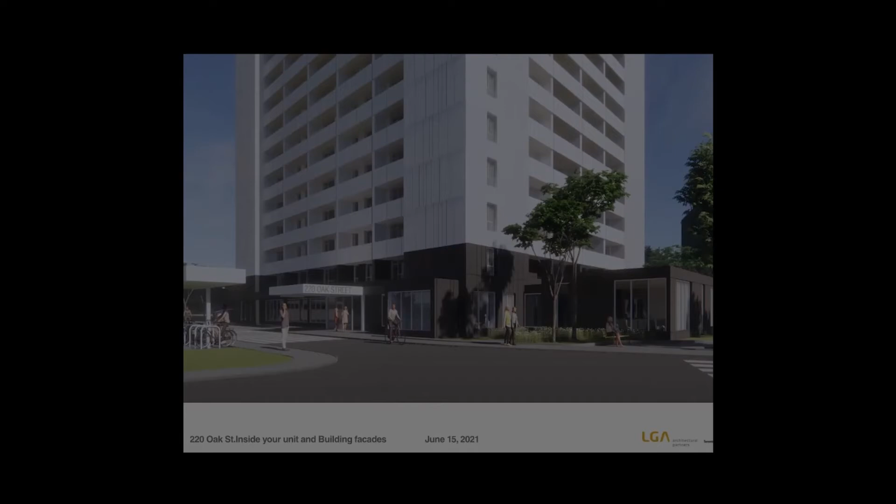First, just want to acknowledge some items here.

Despite the fact that this meeting is virtual, this is not how we want to do it, but this is how we're forced to do it in light of the past year.

First off the bat, we acknowledge the land that we are meeting on and within the cyber world on the traditional territory of many nations, including the Mississaugas of the Credit, the Anishinaabe, the Chippewa, the Haudenosaunee, and the Wendat peoples, and is now home to many diverse First Nations, Inuit, and Métis peoples.

We acknowledge that Toronto is covered by Treaty 13 with the Mississaugas of the Credit. Also like to acknowledge a lot of folks on the line right now.

So many people have been so important and with us along the way through the past couple of years. It's been a difficult road, especially within the past year.

But any project that's worth doing is worth doing well, and it's worth being as thorough as possible. And I think that's what we're trying to do here.

And so with that, I want to acknowledge and thank Kathy Birch for her help on the accessibility side of this project and coordinating that side.

Making sure that any designs that we're going to be endeavoring upon meet the needs of all people, able-bodied and not, ambulatory and not, and for anybody that has different abilities.

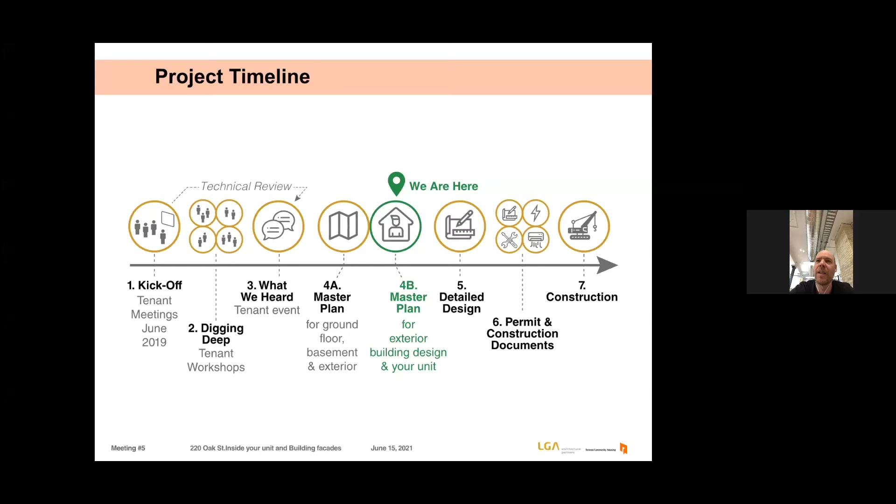Next slide. Just to recap all the engagement we've done - this is more a way to acknowledge and tip our hats off to everyone who's been part of this conversation since the beginning. It's really been a collaborative and a group effort.

We had two kickoff meetings, if you recall. Then we did four deep dives, four topical workshops, followed by sixteen deep dive workshops. That represented a lot of discussion. We heard a lot of different perspectives and points of view, and got the expertise of many different people who have been living at Oak for a long time, people who know the ins and outs of 220 Oak. We've shared all those notes with you, representing a ton of investigative work. We had two meetings afterwards to share our findings, then a meeting to present the master plan, which was our last session. So this is a really important meeting today.

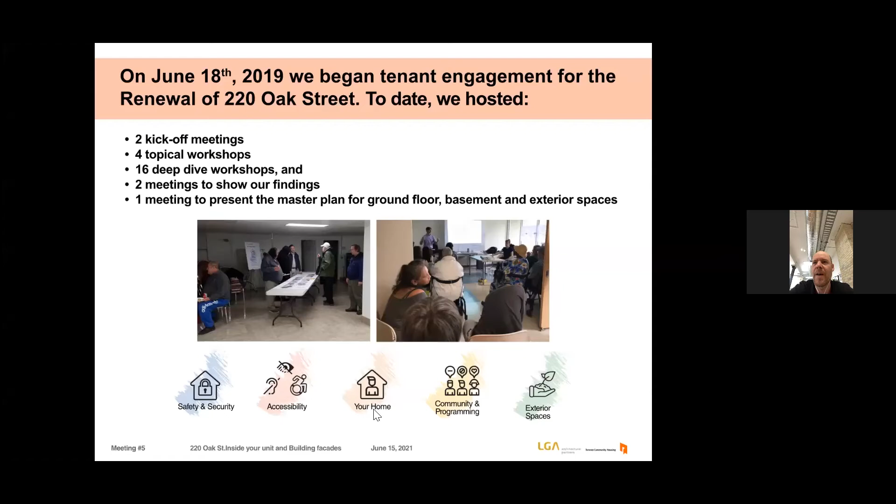All of those discussions have been organized around five central themes. We'd like to anchor our conversations around safety and security, and expand that to accessibility. We focused on inside your homes, and we've elaborated on community programming. Like I said, some of the most memorable moments were walking around the exterior spaces in groups, where we had our feet on the ground.

So today we're going to focus on your home. And just as a recap, sometimes a picture is the best way to say it. If you recall, these were some of the drawings and diagrams that we shared with you last meeting.

We basically put to practice everything we heard about safety, security, accessibility. You can see the new pedestrian walkways that were established, corrections to curbs allowing for accessible transition between sidewalks and pavings, the creation of an official Wheel-Trans drop-off, and examples of more community and resident programming, like the creation of a dog park or the creation and transformation of community gardens.

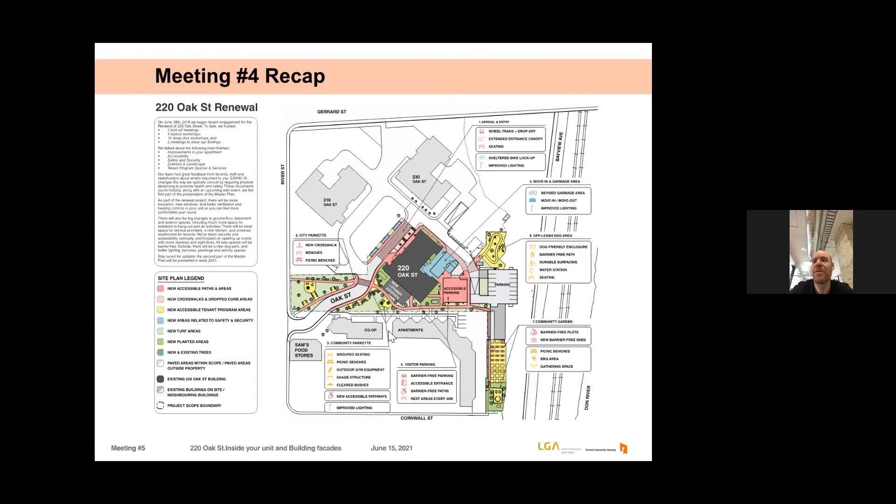That was great discussion on the exteriors, but we didn't show you what the building itself was going to look like. We showed you what was being planned on the ground, and that's what today's discussion is.

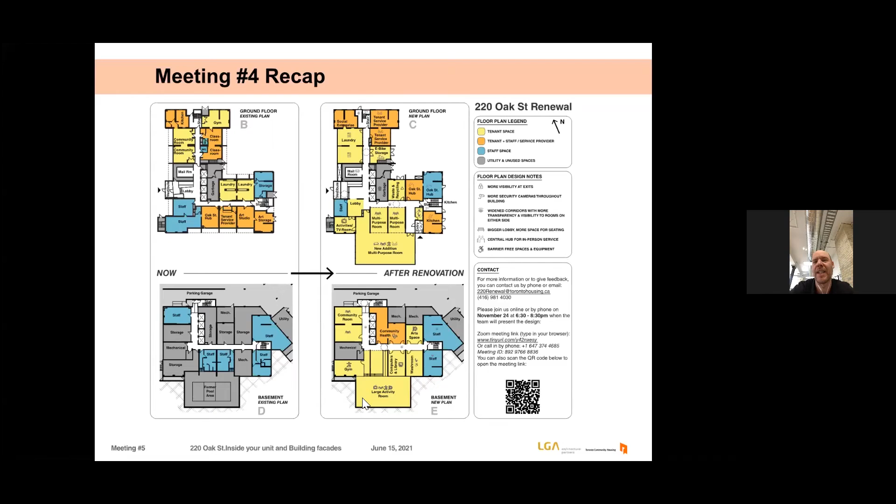It really represents the ability to have larger community meetings, larger resident meetings, activities that, when we started this project, we would meet in Sam's basement. I've always thought it was so ironic that as a group we couldn't meet at 220 Oak because there weren't big enough spaces. Well now you will have two of them to choose from, and I think that's a real triumph on this project.

Moving on to today's topic, like I said, there are 5 major themes. 4 of them we focused on at our last meeting. The 5th one, your home, is what we're going to focus on today.

And I believe now I'm going to turn it over to Sophie to go into a lot more detail about what you can expect in terms of the transformations that are being planned and the upgrades that are being proposed for your units.

Yes, so hi everyone, my name is Sophie. As Adam mentioned, I'm taking over from Chantal, who is now on mat leave. I hope I'll be able to fill in her shoes. I know she did a great job connecting with you guys for the past year or two and laying all the groundwork leading up to today. We're really excited with this project. It's definitely one of the most exciting projects in the office and really a significant one. I've been working in the past few years pretty much exclusively on TCH projects of a similar nature, and this one is really a great one, and it will be really transformative for the community. So I'm very excited and honored to be working with this community.

So there'll be 2 parts to this presentation. I'm going to go through part 1, which will go in detail explaining each upgrade we are doing that will have a direct impact on your home and really improve your living experience. And then Danny will take it over to talk about the exterior and how your building will look.

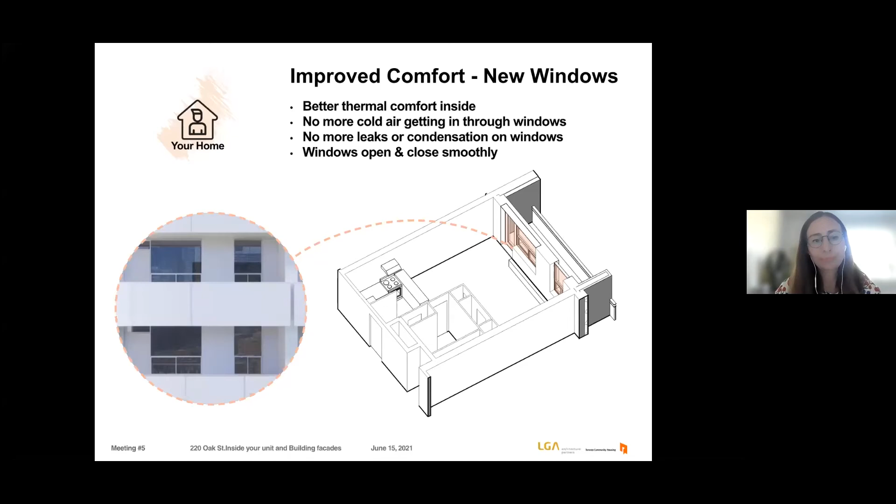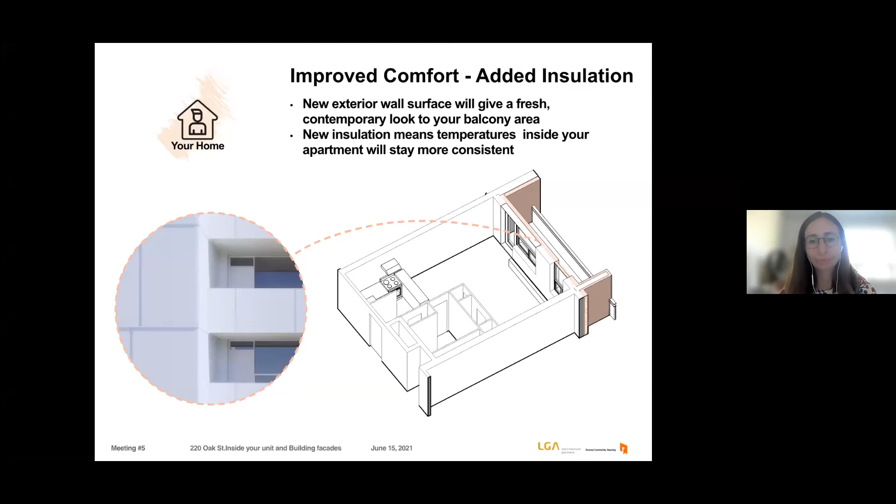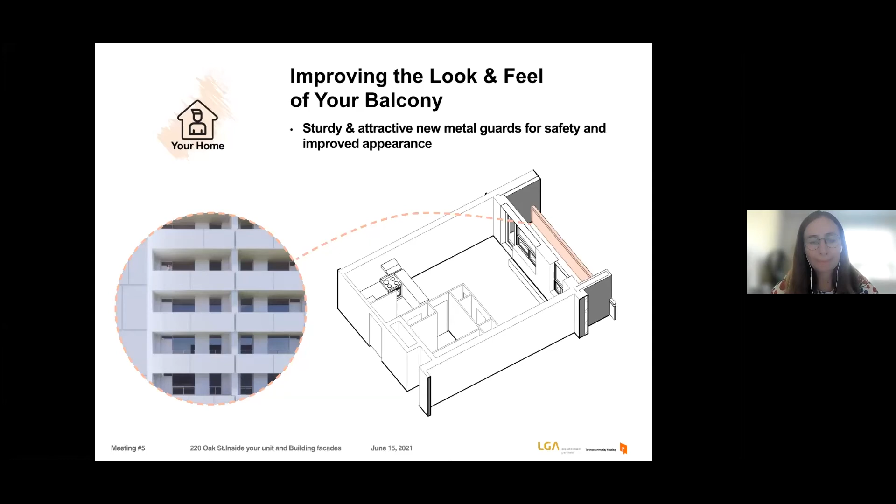Next thing we're doing is something you don't have currently at 220 Oak: we're going to add bird netting to each balcony. Some of you might be familiar with this product. It's really thin mesh, it's not going to obstruct the vision, and it will keep the pigeons away and also increase security and safety.

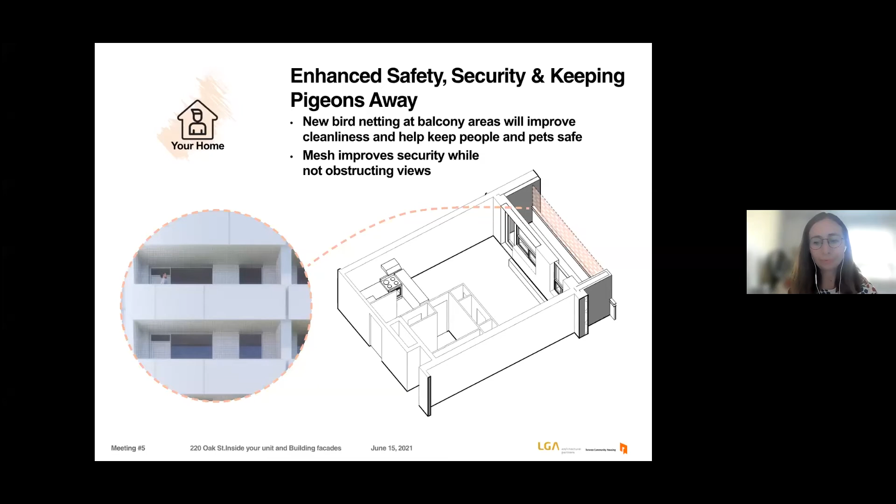We are also improving the air quality inside your unit. We're doing two things to address this. One is currently you don't have a typical range hood above your stove, so we're adding a new one. It's going to be completely connected directly to the outdoors, so any odors from the food and grease will go directly outside. It will be much more efficient. At the same time, we're doing throughout-building upgrades.

So replacing some of the existing mechanical units that are on the roof, changing all the grills in the corridors, and making sure the ventilation is in working order and there's sufficient ventilation. This will help air quality inside, but also mitigate the transfer of odors between corridor and units.

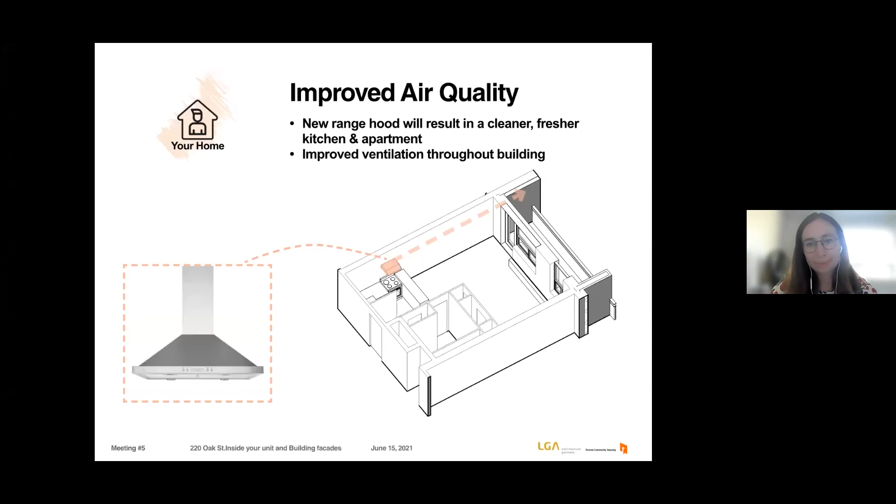We're adding thermostats. So the existing radiators have two parts. One is the pipes inside, which we're going to clean and repair if the cover is broken, or replace the cover if it's really not repairable. And then we're putting a new valve connected to a thermostat. This allows you to control only your radiator, independently from the entire building. So currently, if it's going full speed in the spring and it's too hot, you can't control it. This will allow residents who prefer their apartments more or less hot to regulate them.

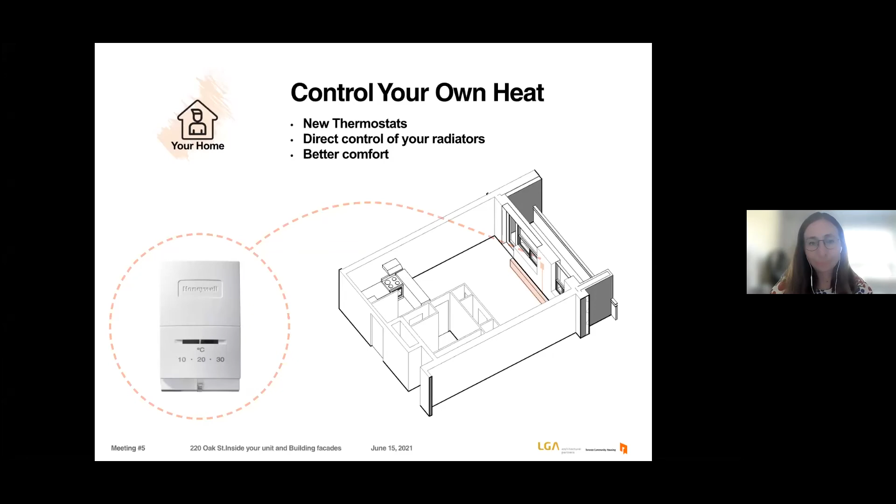We're also addressing the reliability of the hot water and the pressure as well. So we're doing some replacements of mechanical equipment again, and some plumbing, to make sure that when you take a shower, the hot water is consistent and the pressure is also consistent.

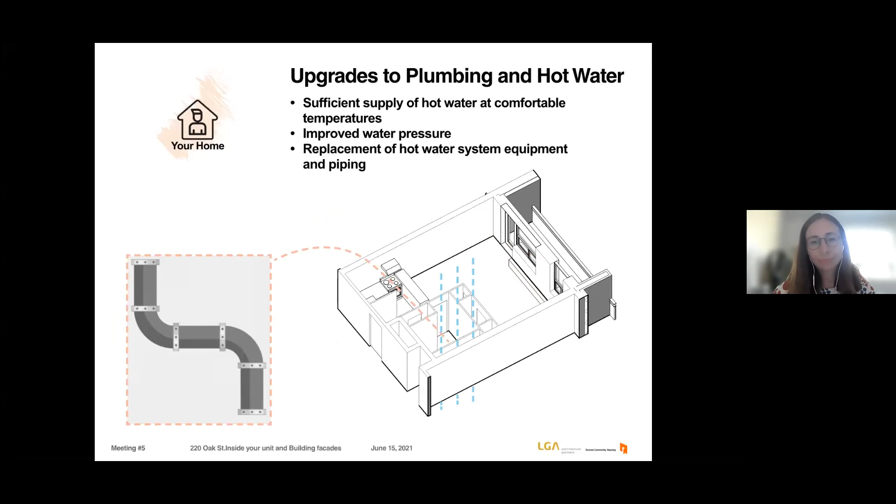And that's it. And then back to Danny. Okay.

Now for the building exterior. A lot of what Sophie was showing talked about the added layers to the exterior. The analogy we always use is that this building is going to get like a brand new parka, but that doesn't really do it justice. What I'm hoping is the images we show you today will finally reveal what's being planned in terms of the new product. So we're getting new insulation and a new metal cladding system, new balcony guards, new windows, and new doors. It's going to completely refresh the look of the building.

Here is a view, if you can imagine, taken of the city from a helicopter. It's actually a Google Earth view, and it's showing 220 Oak with the rest of Regent Park and the rest of the city of Toronto in the backdrop. Basically what we're saying is this building is going to look brand new and be just as good looking and just as vibrant as any of the new buildings in Regent Park.

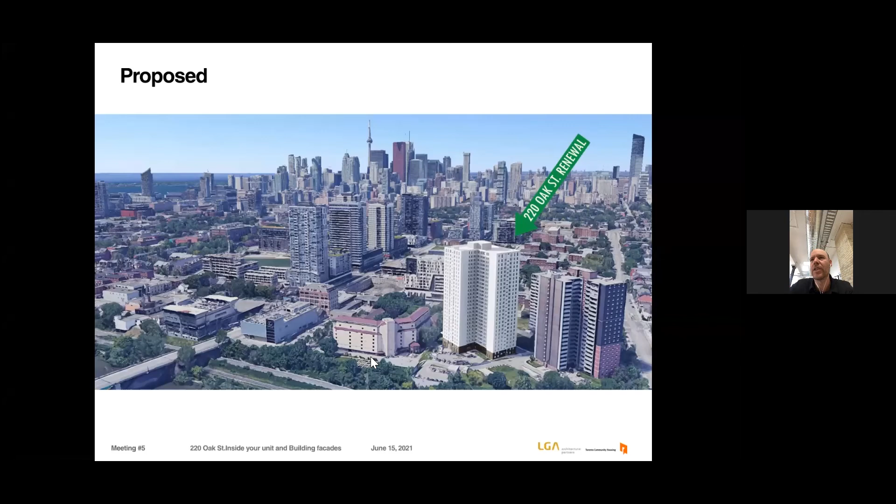I want to show you the image on the left showing the existing old brick building with exposed concrete slab edges and all of those old rattly, leaking windows. And the image on the right shows the new building: new insulation, new metal cladding, new windows, new balcony guards. This is all the latest kind of high-tech cladding, durable. The insulation has the highest R-values that we can use. The windows are of great quality in terms of their resistance to air leakage and water leakage. They're going to be better at keeping out noise, from traffic and from the outside in general. So we're putting a brand new exterior look and finish on the building.

So we're going to zoom in because I want to show you some details. I want to take a step back. Samuel, can you go back to the overall image? I just want everyone to understand — these are the proposed materials. We spent a lot of time researching insulation and metal panels, balcony guards and windows, and so we found the products.

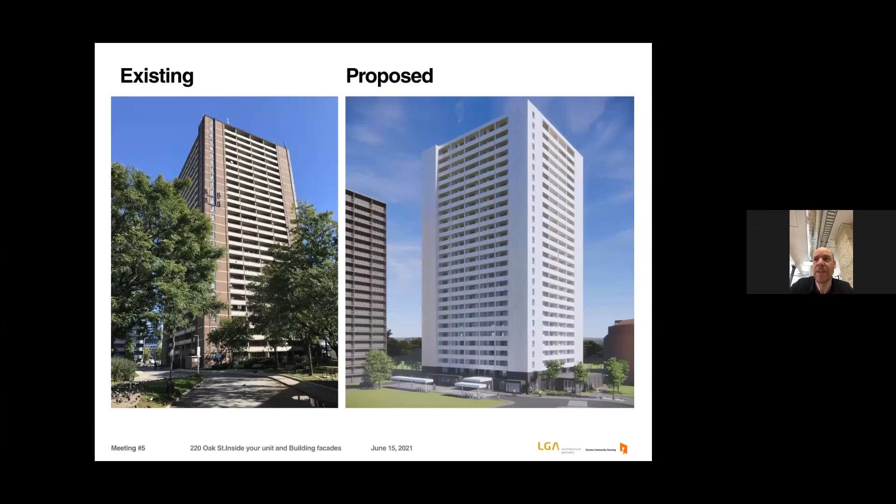We have not picked final colors yet. These products come in many different colors, and that's what we call the final design. We wanted to show you what we're proposing, and then we're going to go away and sink our teeth into color options, and come back to you with a discussion about colors and do a final color presentation. So we're showing you the most standard and neutral colors, which keeps the conversation focused on the actual products. But I want you all to know that the final color selection is still underway.

In the next slide, we get a little more zoomed in, and this is what I really wanted to highlight. You can see the new entrance canopy and the new entrance at 220 Oak. It's supposed to be a lot more inviting, welcoming, and safer. We've got the Wheel-Trans just beyond there, new provisions for bike locking with canopies again, so that if it's raining or super sunny, you can take shelter while locking your bike up, or if you're waiting for a ride outside the front doors.

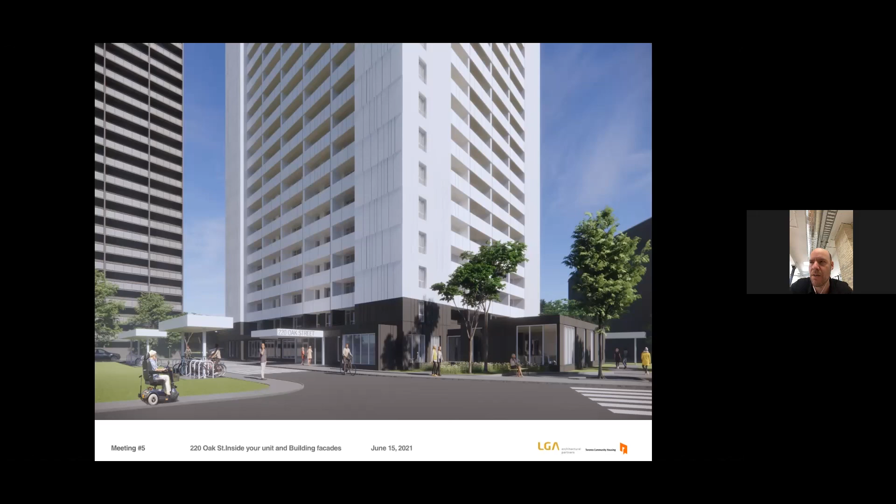This image shows a lot of what we're planning, how we're planning to transform the exterior. So that site plan that I showed you, we've tried to put some of that into practice in this 3D rendering. You can see, for instance, we start to show benches and seating and a little parkette on the grounds. You can see new pathways that will take you through the site and to the community gardens beyond. At the end of the day, everyone's getting a brand new building.

I think I've said a lot. Maybe too much. I don't know.

But I want to turn it over to Jesse for a moment, so he can talk about some of the ongoing engagement and ways you can reach us. And then I'm really excited to turn it over to all of you and have discussions, debates with Miguel about hot pink as a viable metal cladding color. I'm watching the chats, but really, we've all been at this for such a long time. I feel like we all know each other fairly well, and I'd love to hear what everyone's thoughts are too.